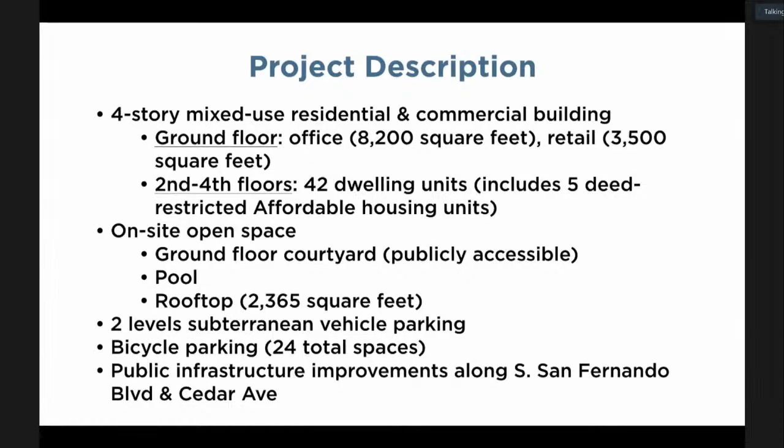The project includes the following land use entitlements and requests: a conditional use permit to allow for a mixed-use project, meaning residential above commercial use, in the BCC3 zoning district; a request for development review to construct new dwelling units and new commercial construction exceeding 1,000 square feet; and a lot line adjustment to remove interior lot lines between the 4 existing parcels that make up the project site to merge into one parcel.

Additionally, the project applicant has utilized a request for state density bonus. As authorized by state law, the state density bonus allows for a 35% increase in dwelling units beyond the otherwise allowable base density, in exchange for providing a percentage of those dwellings as deed-restricted affordable housing units. The criteria for density bonus is specified in state law.

In addition to the affordable units being provided through density bonus, the project is also subject to the Burbank Inclusionary Housing Ordinance.

Pursuant to the California Environmental Quality Act, or CEQA guidelines, the project was determined to qualify for a Class 32 infill exemption. Staff worked with a CEQA consultant to undertake the required analysis, and this report was provided in Exhibit H to the staff report.

The project site is located at 624 through 628 South San Fernando Boulevard, approximately half a mile southeast of Burbank City Hall. The site is currently made up of 4 parcels totaling approximately 30,947 square feet. The site is developed with 2 commercial office buildings, approximately 11,194 square feet in total, with surface parking in between.

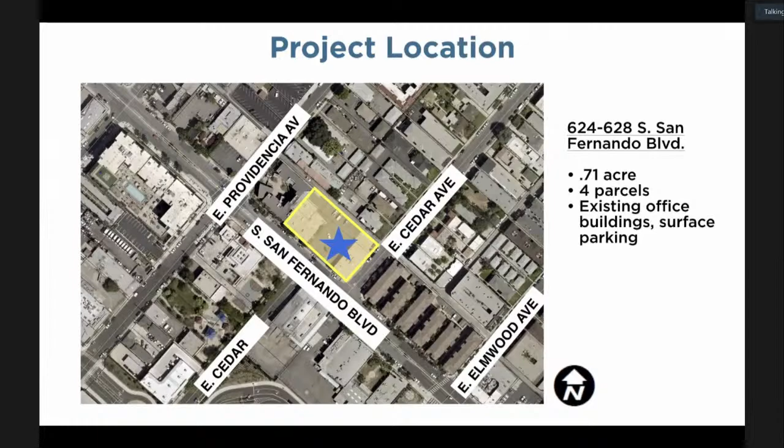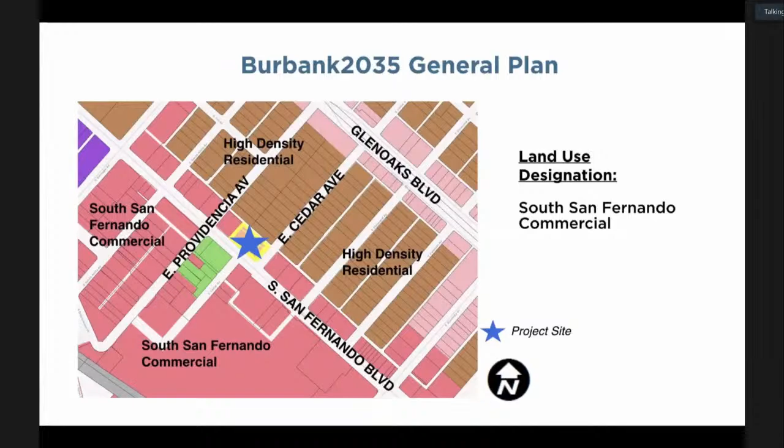The Burbank 2035 General Plan land use designation for the project site is South San Fernando Commercial, described as being connected to the core downtown area, providing convenient access to transit and the ability to walk to shops and businesses in downtown Burbank. This land use designation was anticipated to include a combination of residential units and a mix of commercial uses.

The project is also located within the Burbank Center Plan, within the South San Fernando subarea. The Burbank Center Plan similarly envisioned that new development within the subarea should emphasize mixed-use projects that include ground floor retail with office and/or residential above the ground floor on the east side of South San Fernando Boulevard, where the project site is located.

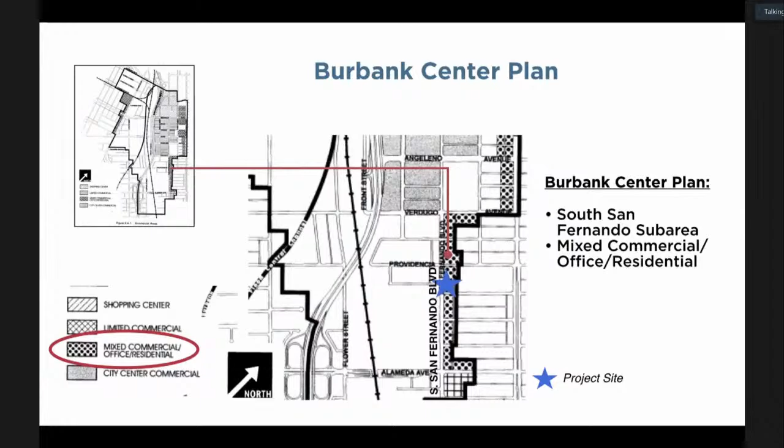The zoning for the project site is BCC3, Burbank Center Commercial General Business. Consistent with the descriptions in the Burbank 2035 General Plan South San Fernando Land Use Designation and the Burbank Center Plan South San Fernando Subarea, the BCC3 zone is intended for mixed-use commercial office residential development. As specified in the Burbank Municipal Code, mixed-use projects in this zone are subject to R4 high-density residential multifamily development standards, with the exception of setbacks and landscaping of setbacks, which are subject to commercial zoning standards.

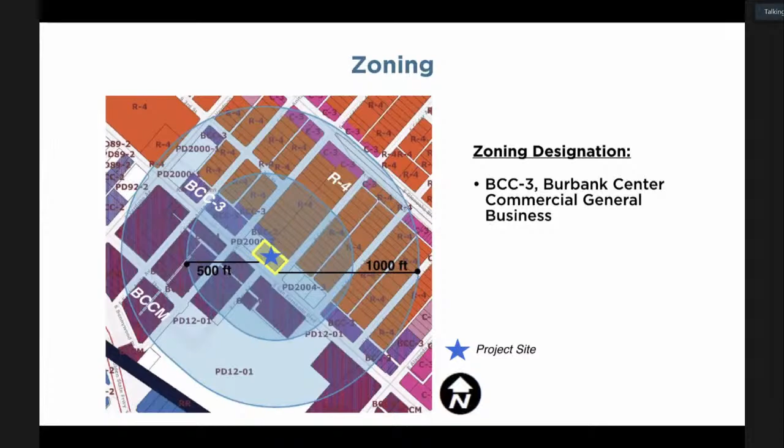Office tenants would have direct access to a small outdoor seating area and a publicly accessible courtyard with permanently affixed outdoor seating, and a public art feature would be centrally located within it with access from South San Fernando Boulevard.

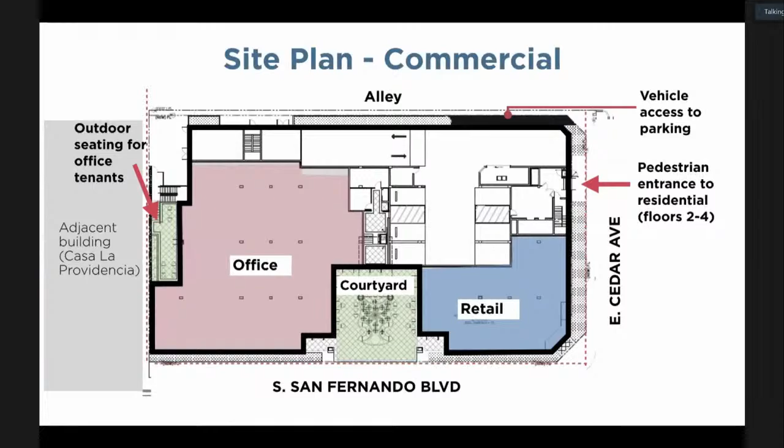The residential lobby is located north of the retail space with pedestrian access from Cedar Avenue. Vehicles entering the site to get to the subterranean parking would access a driveway on the alley side. The other areas within the first floor building footprint include the residential lobby, restrooms, ADA accessible parking stalls, truck loading, the electrical room, and trash and recycling.

Each residential unit, with the exception of one unit on the second floor, would have private open space in the form of a patio or balcony. A 2,955 square foot outdoor pool and courtyard area is provided on the second floor, which is connected to a 1,135 square foot gym and rec room. These features serve as the amenities for the residential tenants.

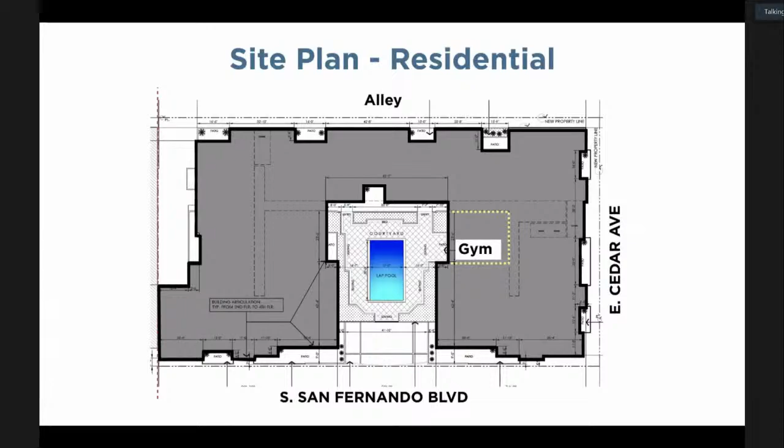As previously noted, the project will include public infrastructure improvements. Specifically, the applicant would be required to dedicate an 8-foot portion of the property adjacent to the South San Fernando Boulevard frontage and a 5-foot portion of the property adjacent to the Cedar Avenue frontage to create 15-foot and 12-foot wide sidewalks respectively, consistent with the Burbank 2035 general plan.

A 2-foot 6-inch portion of the property adjacent to the alley will also be dedicated, as well as a portion of the property at the corner to achieve a 15-foot corner radius at San Fernando Boulevard and Cedar Avenue. Collectively, these requirements will result in widened sidewalks around the project site, reconstruction of the corner pedestrian ramp to achieve ADA compliance, new street trees, and the closing of 2 driveway curb cuts along South San Fernando Boulevard.

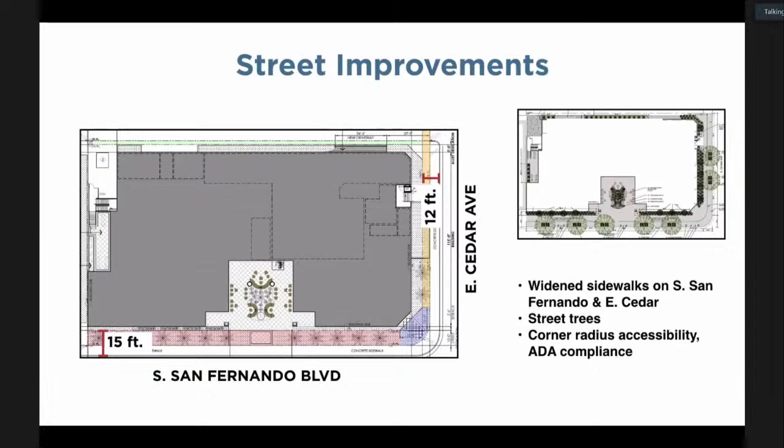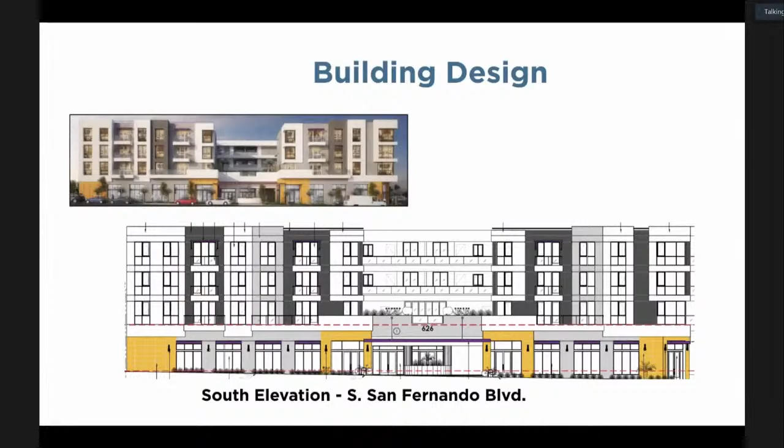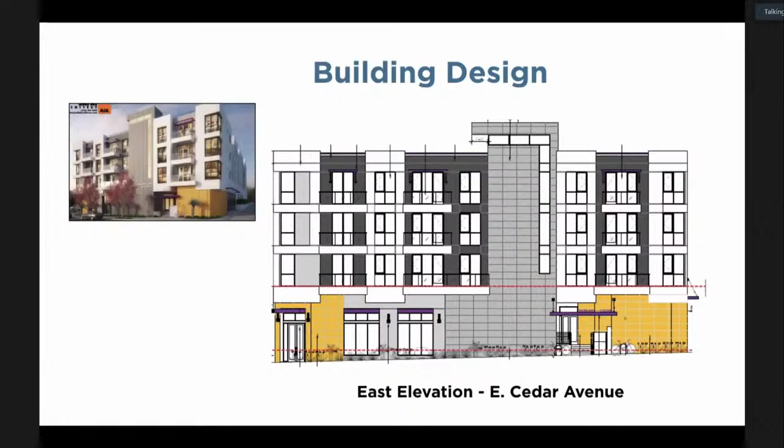This here is the east elevation along East Cedar Avenue. The elongated element towards the middle provides some additional interest on the secondary facade. And as previously noted, the pedestrian entrance to the residential lobby is accessed from this side, where it faces residential across the street on the other side of East Cedar Avenue.

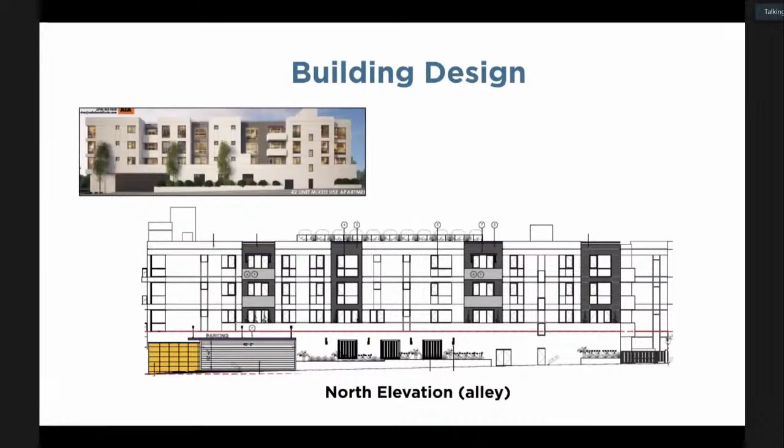And this is the north elevation on the alley side. This elevation also shows a portion of the proposed rooftop open space area where the landscape buffer would be raised above the level of the parapet wall to provide additional screening from the residential area across the alley.

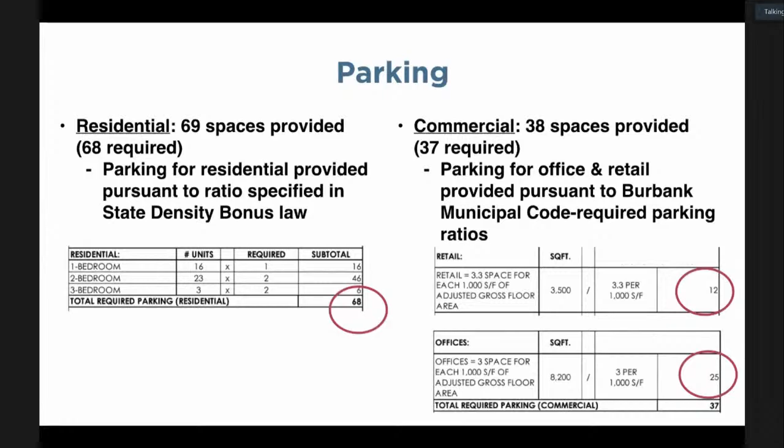The project proposes the majority of the required parking to be located within 2 subterranean parking levels, with 6 of the required spaces located at ground level. The rest of the parking for the retail and office uses would be provided in the first subterranean parking level. Parking for the residential uses would be within the first and second subterranean parking levels, with a gate separating the two.

In total, the project will include 5 deed-restricted affordable housing units throughout the building. 4 of these will be set aside for households that qualify as very low income, and 1 will be set aside for those qualifying as low income per state income limits.

The affordable housing units are generated from a combination of the state density bonus request and the city's inclusionary housing ordinance. Under the inclusionary housing regulations, at least 15% of newly constructed dwelling units must be rented at very low and low income levels, at a rate of 5% and 10% respectively, a total of 5 units in this case. This is calculated from the base density before applying the bonus density units.

As part of the density bonus request, the project will be providing 11% of the units for very low-income households. The inclusionary ordinance allows these affordable units, provided as part of the density bonus request, to count towards the required inclusionary housing affordable units. Therefore, the project's 4 very low-income units provided through density bonus also serve to meet the inclusionary housing requirement, with 1 additional low-income unit remaining.

Therefore, in order to comply with the inclusionary housing requirement, 1 unit set aside for a low-income household is provided in addition to the 4 very low-income units. The affordable units will be deed restricted for a minimum of 55 years. A detailed breakdown of the affordable housing calculation is also provided in Exhibit F to the staff report.

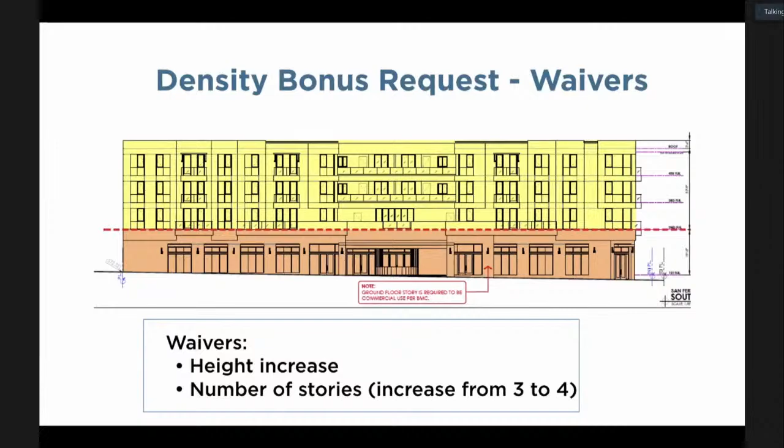As previously noted, the developer is required to dedicate portions of the property on all sides for street right-of-way purposes. For instance, 8 feet will be dedicated along the South San Fernando frontage, approximately 229 feet 6 inches in length.

The applicant has therefore requested a waiver to reduce the allowable front yard setback.

Additionally, the lot coverage represents the maximum allowable building footprint relative to the lot size, a maximum of 70% of lot area based on the R4 high-density residential standard.

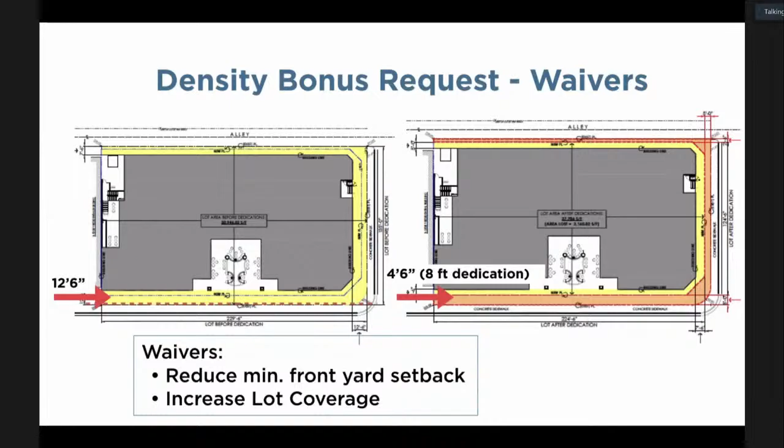Due to the reduction in buildable area resulting from dedications at the front, corner, side, and rear of the property, the applicant has requested a waiver to increase the allowable lot coverage by 2.5% above the otherwise allowable. For reference, the area of dedication along the front is approximately 1,832 square feet.

As the project is a mix of uses with commercial on the ground floor and residential above, the applicant has proposed to meet the amount of required common open space by distributing these areas along the ground floor to be accessible for the public and users of the commercial space, the second floor, and the rooftop area.

The R4 development standards that typically apply to all residential projects specify that rooftop open space can be provided but cannot be counted towards the required common open space calculation.

Additionally, per the R4 standard, any rooftop open space is required to have a 6-foot-tall opaque wall around it and be set in at least 5 feet from the elevation that is set in furthest away from the property line.

In order to construct the 42 units allowed pursuant to the density bonus request, while providing ample open space dispersed throughout the project at the amount specified in the BMC, the applicant has requested a waiver to allow rooftop area to count towards the required common open space calculation, thereby meeting the total minimum required.

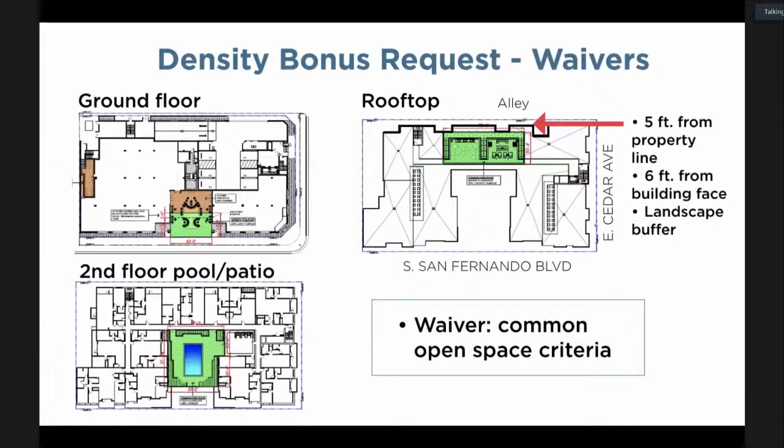The R4 zone development standard requiring one minimum 50 square foot private open space area per dwelling unit applies to the project. As proposed, one dwelling unit on the second floor does not have the required private open space.

Per the applicant, the unit without the private open space was reduced in square footage relative to all other dwelling units in order to accommodate space for a required amenity, the gym room, which is also located on the second floor.

Additionally, the R4 zone development standard requiring direct views onto on-site open space or a public street applies. Alleys do not count as public streets for the purposes of this requirement.

The project proposes to have direct views onto a public street or on-site open space for those units that are oriented towards a street or on-site common open space.

Due to the configuration of the building and the site's close proximity to the adjacent residential building to the immediate west, some units cannot physically be constructed in a way such as to meet this requirement with all of the criteria applied.

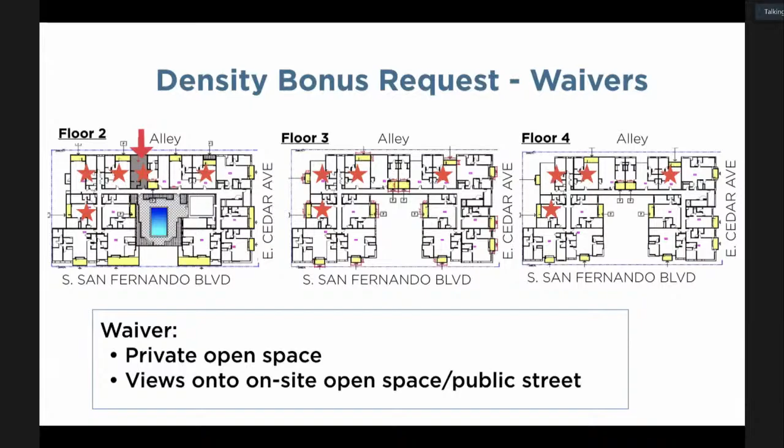For each floor, these units are identified on the slide with a red star. These units would still have private open space areas, with the exception of the one unit just described.

The last remaining entitlement requested is a lot line adjustment, necessary to consolidate the 4 existing parcels into one project site, shown in red outline, by removing the interior lot lines. The lot line adjustment was reviewed by the Public Works Department and the Community Development Department's Planning and Real Estate Divisions, and, as conditioned, complies with all applicable requirements.

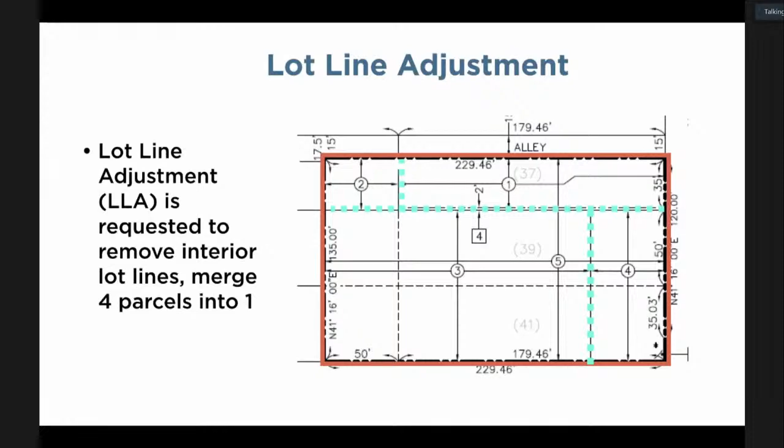Having summarized the details of the project description, affordable housing component, and density bonus waiver request, it is staff's assessment that the project is consistent with all of the applicable requirements necessary for approval, as outlined in the project findings included in this evening's staff report and the Exhibit A resolution.

In summary, the project is consistent with the city's land use policy documents, including the Burbank 2035 General Plan Goals and Policies, the Burbank Center Plan, and the housing element, including the Regional Housing Needs Assessment, or RHNA, which establishes the city's housing production and affordability goals pursuant to state housing law.

As described in the South San Fernando Commercial General Plan Land Use Designation, as well as the Burbank Center Plan, the area along South San Fernando Boulevard, including the project site, was envisioned to facilitate opportunities for residential units in addition to a mix of commercial uses that connects to the broader downtown area.

The site location within the Burbank Center Plan is also appropriate for new housing due to its close proximity to non-motorized transportation options, including a walkable distance to businesses and services within downtown, proximity to the Metro 94 bus route, and a 0.6-mile distance to the downtown Burbank Metrolink station.

The project's mix of uses, unit types, and affordability demonstrates consistency with goals and policies of the general plan housing element, including the goal to provide housing sites that accommodate a range of housing types and the creation of housing affordable to all economic segments of the community.